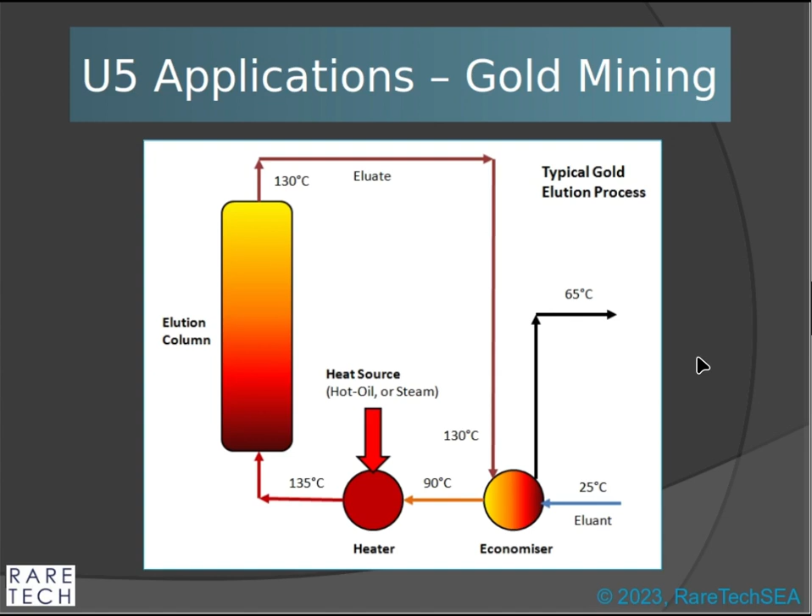Alright, so then we go from there. Let's have a look and see if it decides to advance. Doesn't want to. There we go. So, this is what some of the units look like. Whoops, I've gone too far. It has a jerk to this thing, so this is what the units look like.

So at a typical gold mine, what you'd have is the economizer, which is what I showed you before, is going to be the bigger of the two. And then you've got a matching heater. Now, what I find really odd about some of these designs here is that the flow rate through the economizer and the flow rate through the heater should be the same. So sometimes you can get it, let's say 4 over here and 3 over here. But these are ones probably designed after my time, because I would have been quite careful about this. I might have reduced that to a 3, for instance. But it depends on my flow rates.

But this one to me should be probably 3 by 1 or 3 by 2, because you're handling the same flows. If you go back to this picture, it's the same flow going through here, the same mass flow. The volume will change slightly, but not that much. Okay, so with the matching, you've got to be a little bit careful. Sometimes though, we had to pull a few tricks because of pricing. Okay, so this would typically be heating, and this would be the economizer.

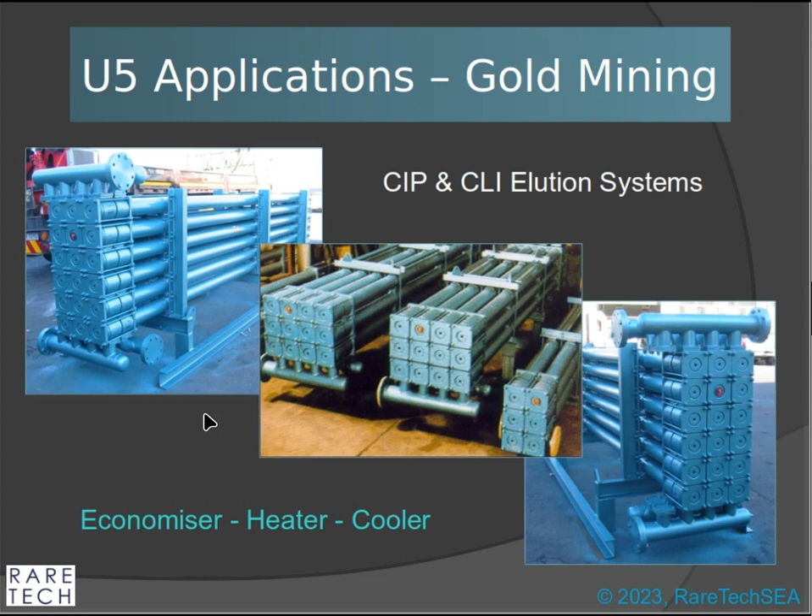Let's talk now about sugar and the sugar industry. And this, from recollection, is where Gasalta, the original developer, got into and made his units. In other words, sugar processing, sugar juice coolers, mash feed heaters, works nicely. Sugar-based processing, furfurals, a lot of furfural units for the sugar industry in South Africa, coolers and economizers, rum coolers, they make a lot of rum from the sugar cane. Acid heaters and coolers, solution coolers, after coolers, preheaters.

So this was very popular because you could add an extra module to recover more energy. You could put another bank in parallel, split it up, do what you like. It was Meccano set. Supporting operations for the sugar, things like oil coolers, of course, turbine oil coolers. I explained that in one of my other presentations.

What you're doing is you've got oil that's circulating in the turbines, and the turbines are steam turbines, and for some of their big drives, instead of electric motors, they're using steam, and you've really got to control the oil properly. If you don't get it right, you damage a turbine, and turbines are very expensive to replace. They make steam from the waste, the bagasse and so on, from the sugar, and then they can push it through the turbine. So it's cheap, it saves them money, it's energy recovery.

Things like gearbox oil coolers, all your big gearboxes are going to have an oil cooler. You pass water through the oil cooler and keep the gearbox, especially the big ones in the sugar industry and so on, cool. Vacuum pump seal coolers, demineralized water heaters and coolers. Demin is quite tricky stuff sometimes. Effluent coolers, plenty of that.

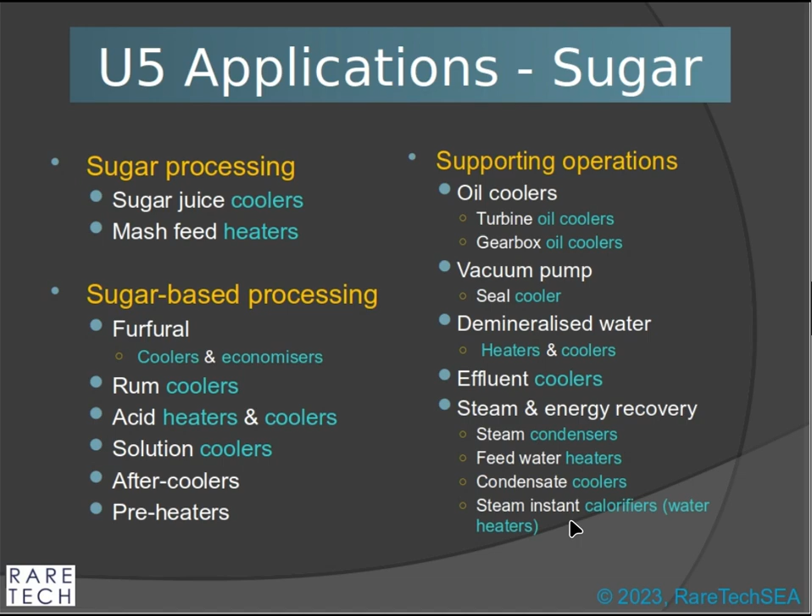And then if you go into the next one, oil coolers, again, a whole range of these, and some of these got really big. Vegetable oil, so cooler heater economizers. Sunflower oil, the same thing. Oil economizer, Dowtherm heaters, bleached oil, fish oil, fatty acid, tallow, marine oil, slop oil, airpure oil, decant oil, gearbox oil, engine oil, bearing oil, you name it, turbine oil, dredger oils for the dredgers that dredge up the sand of the ocean, crusher oil, compressor oil, thermal oil, waxy oil, different types, transformer oil, quench oil.

Quench oil is where you're trying to quench components. They use these in the railways in South Africa. So you've got oil and you're trying to keep it cool, and you're quenching parts to harden them. And the oil gets pretty hot, so you're going to take the heat out. Hydraulic oil, soluble oils, fat coolers, and so on.

And the thing to remember, when you're working with oil, as I mentioned in one of the other videos, it tends to give you a laminar flow, which is very poor heat transfer. And then the units can be massive. So what we do is we put the oil on the shell side, outside of the tubes, and then we use mechanical turbulation. In other words, because of the spiral baffles, you're actually generating circular flow, and you're mixing things up in a nice way, and you end up with a pretty good heat transfer coefficient. So these units turn out to be pretty good. That's why we put the oil on the shell side.

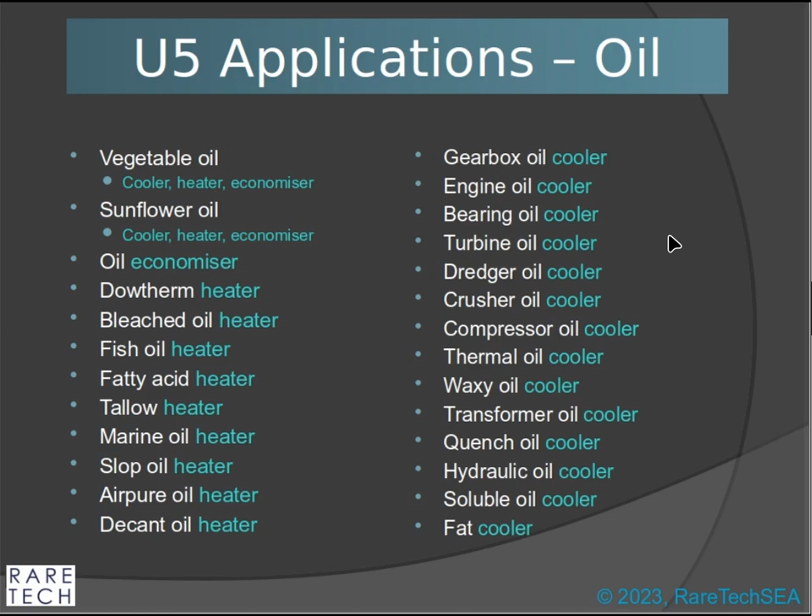All right. And then moving on to some of these applications, you start to get larger. If I remember rightly, I think this was a phosphoric acid system. If you look at the stand, obviously the flows were in and out. Or this was just blanked at the end to clean later, I think. So you would come in. And then these end caps, I would normally have put them down. But the guy, he's like that. And so you can drain the thing. But he probably didn't bother when he built it. I would have had them down so I can drain out of the thing.

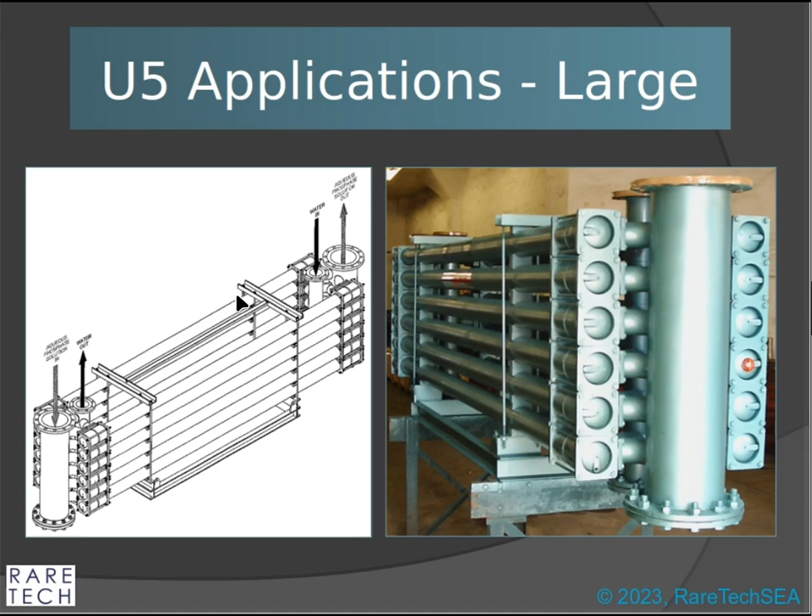And this is a schematic of it before building. And then the builder gets this and he goes ahead and he builds it. All right. So you get it, you draw up the ISO, and then you end up. Sometimes we didn't do that. We just did normal A3 drawings, I think. Some are a bit bigger. Depends on what we were doing. And then you go along. This is now this particular unit which I spoke about earlier, and that's the ISO of it as well.

We got a bit fancier sometimes, but in this one, I have to say I don't like the supports. I feel these are too flimsy. You've only got vertical support, but there's nothing on the side, and if you have a problem lifting, this whole lot's going to come loose. So I put a lot of work into cleaning that all up, doing a better job of that.

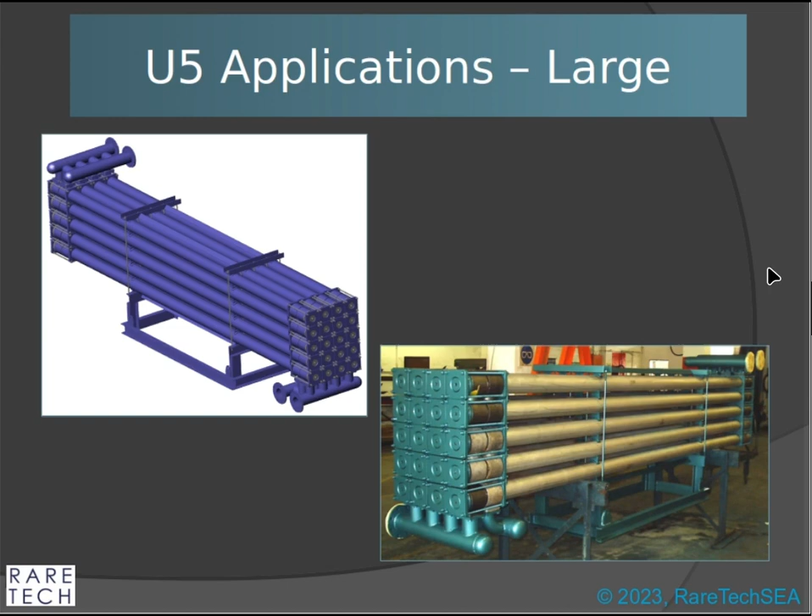All right, and then this one is actually quite interesting. This was built, funnily enough, just before I got back to this company that I eventually bought. They had done this project, and it was to replace a plate heat exchanger of all things, in a very tricky application. And you'll find these materials here are Synicro, really expensive stuff. Synicro is really not cheap. And the original design, for some reason, the previous designer had done a mild steel and Synicro combination. So for the aggressive fluid, he'd gone for Synicro because of price. Obviously, he's trying to bring the cost down.

And so this whole construction, you see, it's a 48 module unit. Quite a task undertaking. And in this case, you've got, if I remember rightly, 12 in parallel, 4 in series, which you see going in series. So you'd come in and then go down, and wrap, come back. This was a monster. I think it was a company called Skorpion that it was for.

And the guy who was commissioning it told me that when they started up, they'd had a few little leaks, which you normally just nip up with the torque wrench, and it's fine, stops. If you get any online leaks, pick it up. Because normally it's pressure tested and everything else, but during transport, things can come a little bit loose. And so before they commission, they should re-torque everything and just double check everything's to the right torque. But what happened is there were some leakages, and it got onto the mild steel parts, and they just fell apart in front of his eyes.

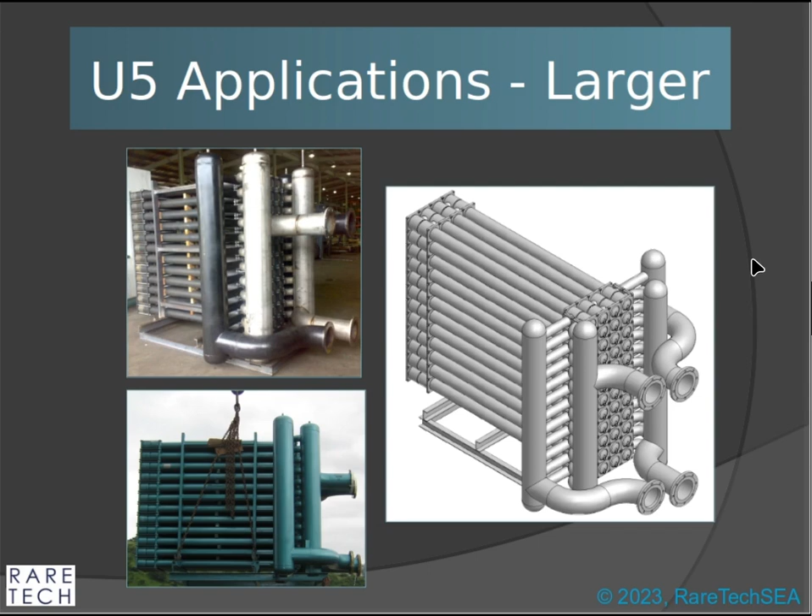And then you go on to conceptually mega, but practically no one's probably going to build like this. But you can put them in banks, and you can place them together if you want to. But you can get to the ends, you can pop the ends out, you can do everything in situ. You don't actually have to take the whole exchanger away. You just unstrip it and work on it while it's there, pull out the bundle, put another one in.

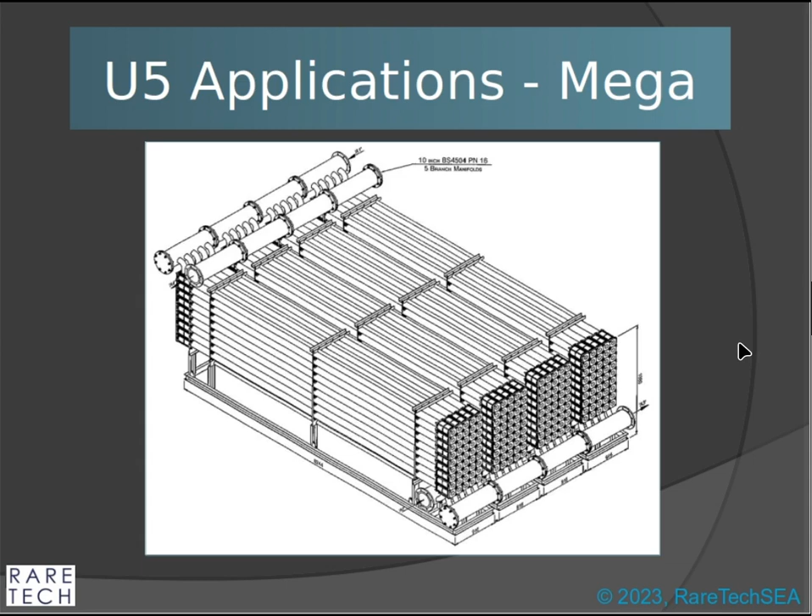It's very easy. It saves you having to lift heavy things around, so it does save you a little bit. But again, I think that's a little bit over the top. I'm not sure if it was ever built that big. Might just be conceptual.

And the main reason, really, because in flows like this, you end up with a lot of flow in series. You might have two passes, but a lot of the flows are in series. So you end up with a lot of thermal length. Actually, out of interest, if you're trying to do plate exchangers, you've got to get thermal length depending on the amount of heat recovery that you're looking for. And plates can get quite big too if you're not careful.